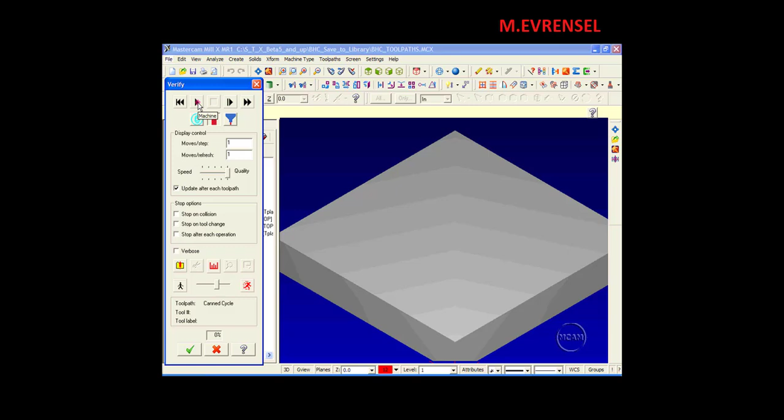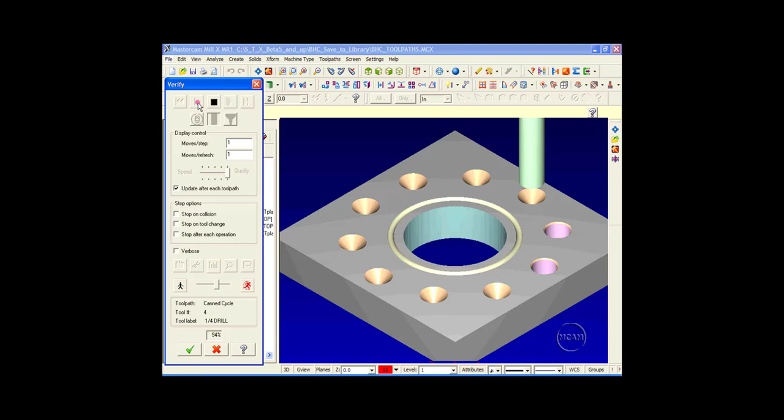Let's see how this looks in Verify. The center hole is being cut using a circle mill toolpath. The detail for the O-ring groove will be done using a contour ramp toolpath. The next operation is a spot drill operation, and this is being drilled to a depth that will leave a chamfer around the 1/4 inch hole. And here's the 1/4 inch drilling operation, and you can see the remaining chamfer from the spot drill operation.

Now the purpose of this exercise is, what if this detail is common to several items within a family of parts? I can create and optimize my toolpaths for machining this detail, then export this group of operations so that I can recall it at a later time and apply it to parts where I wish to use the same strategy.

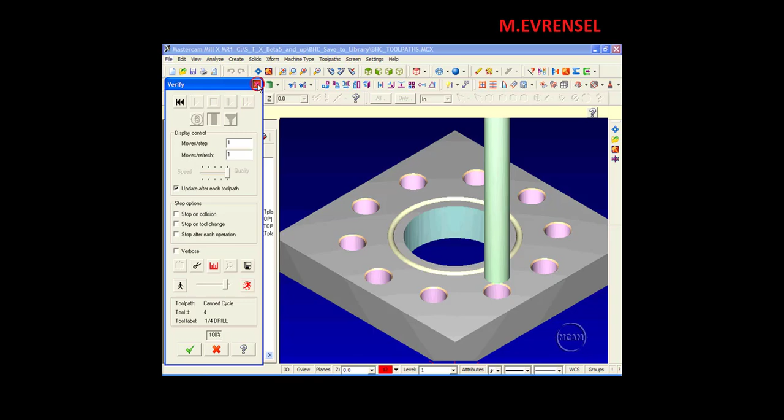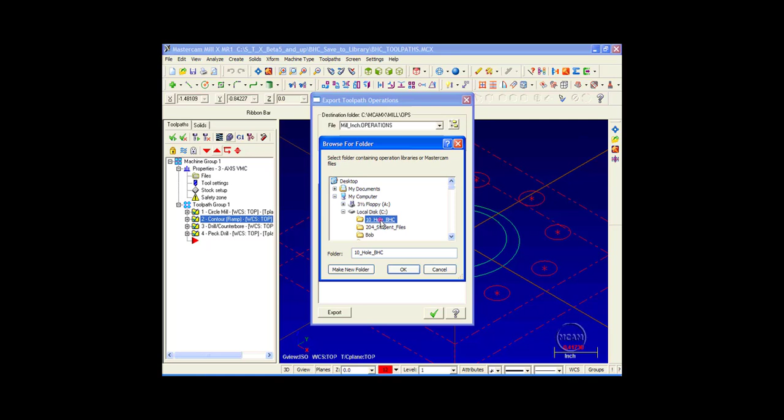So once I've fine-tuned the parameters of my toolpaths, from my Ops Manager I right-click, select Export, and then select where I would like to save this group of operations. I'll click my Browse button, navigate to a folder that I'd created earlier. It's labeled 10-hole BHC for bolt hole circle. Select it, and then click OK. I'll name my file the same thing.

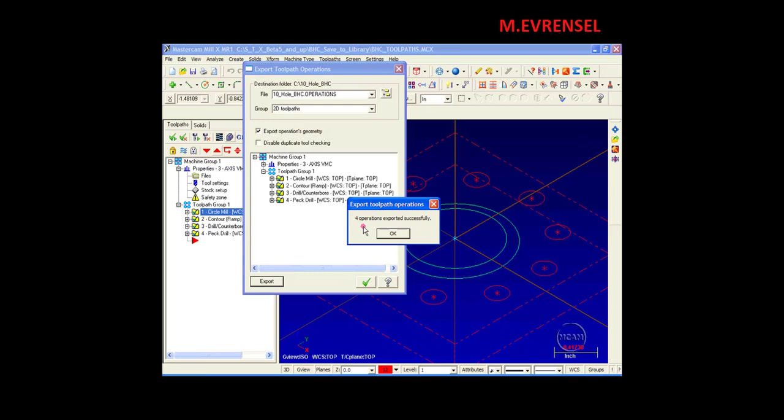Now I have an option to export the operations geometry. With this option checked, Mastercam saves the operations and the geometry that's driving those toolpaths. I'll select Export. I get a message telling me that my 4 operations were exported successfully. Click OK and OK. Now all of these operations are saved into a directory along with the geometry that is driving them.

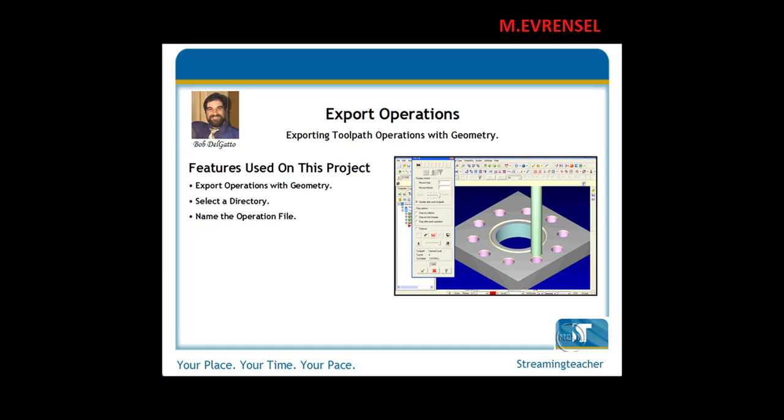Now that we've seen how to export operations to a directory, this video is going to focus on how to import them. This is a group of operations that will machine a 3-hole pattern around an instrument cutout.

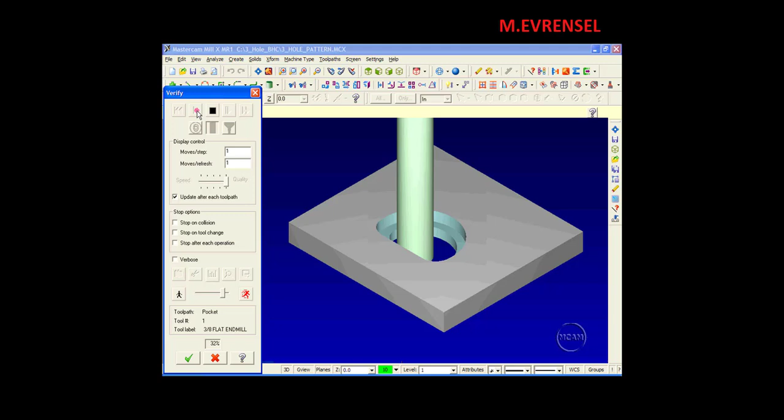We'll go ahead and run Verify so you can see the order in which the operations take place. My first tool comes in and roughs out the inner detail. The same tool machines a counterbore around the surface. My second tool comes in and finishes the inner detail, chamfer, spot drill, and drill.

Now let's say that this pattern is common to several of my parts that I've machined in my shop. So what I've done is I've exported the series of operations that are necessary to complete this detail along with the geometry that drives those toolpaths.

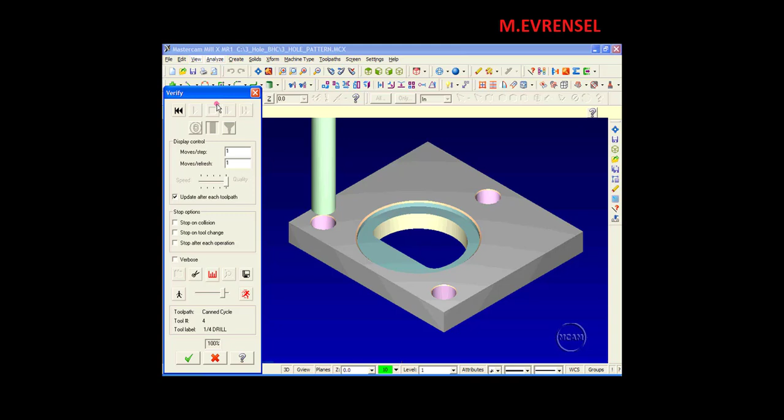So let's say that I produce a face panel for several different customers. Each customer uses the same face panel, but they each require their own unique hole pattern. The hole placement is the same for each of the customers, it's just that each customer has its own unique pattern. So I can have several different groups of operations saved, each group corresponding to the appropriate customer's hole pattern.

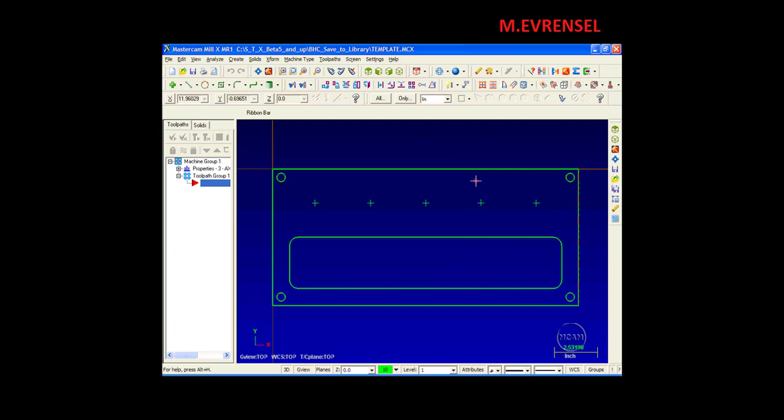Now before I import my operations, I'm going to go into my properties, go to my tool settings, and I'm going to make sure that I disable assign tool numbers sequentially. This way my tool numbers will stay the same as they are in my original operations. Otherwise what will happen is Mastercam will renumber my tools. In this case I don't want that to happen.

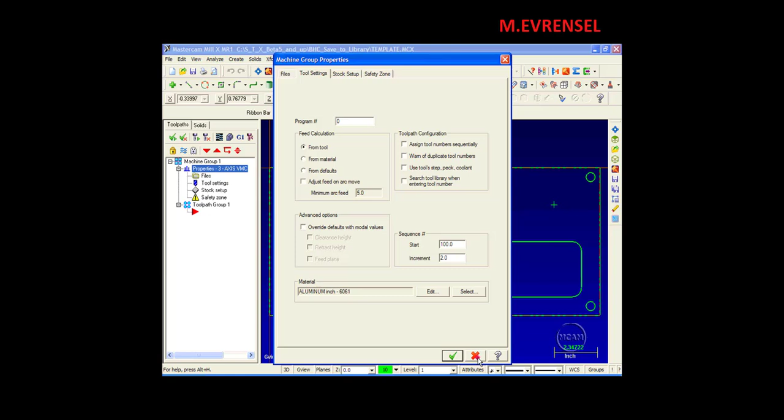Click OK. Now I'll right-click, import, go select my directory, and I have this saved in a folder for 3-hole bolt hole circle. Click OK. Import operations geometry and disable duplicate tool checking. I'll click Import. I don't want to add new toolpath groups, so I'm going to click No.

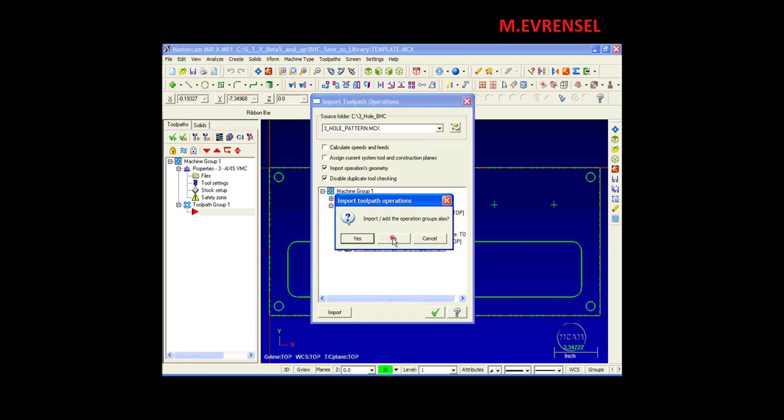Now I'm going to go and just select my points. And it's just like rubber stamping a toolpath. Escape to quit. 6 operations imported successfully. Click OK and OK. Now I have all of my toolpaths in here.

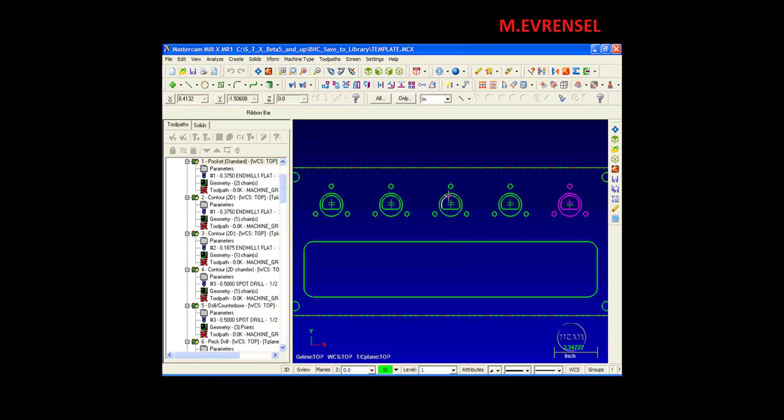I'll regenerate all of them. We'll go into Verify, Isometric View, and we'll run it. And we'll see that it machines all of the hole patterns just like I had saved it before.

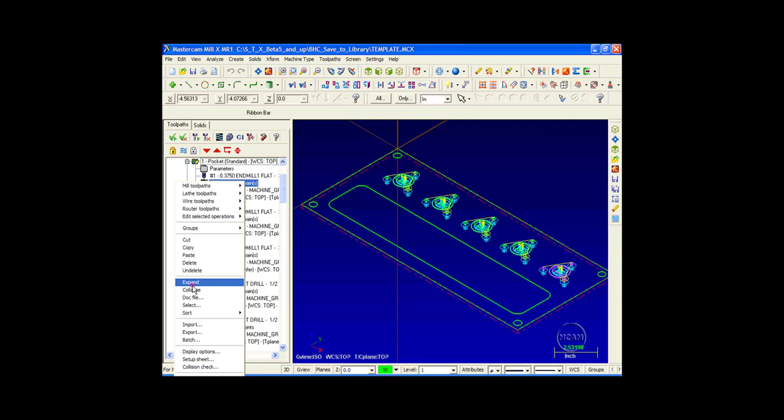Now the only thing that I'd like to change is it's doing each pattern complete, which means that there's going to be a lot of tool changing going on. So what I can do is go back to my Ops Manager, and I'm going to right-click and collapse, right-click again and select Sort, and I'm going to sort by tool number. I'll click OK.

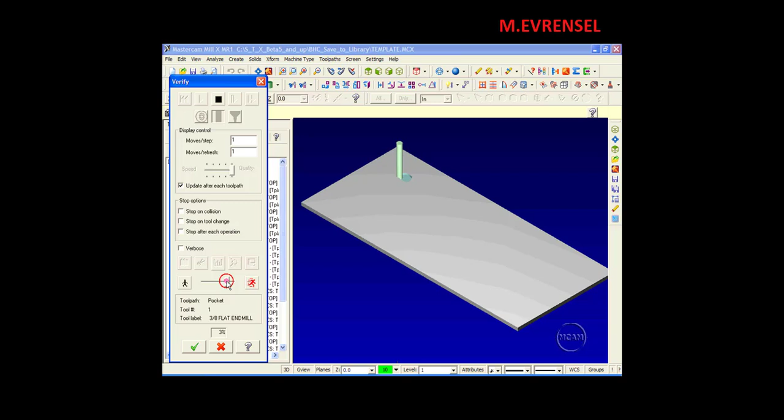And we'll see how this looks now. We'll go back into Verify, and we'll see that all my toolpaths have been arranged according to tool numbers now. So they've been grouped so that I don't have as many tool changes. It's going through and using tool number 1, doing all the machining, coming back in with tool number 2, and so on. And there you have it.

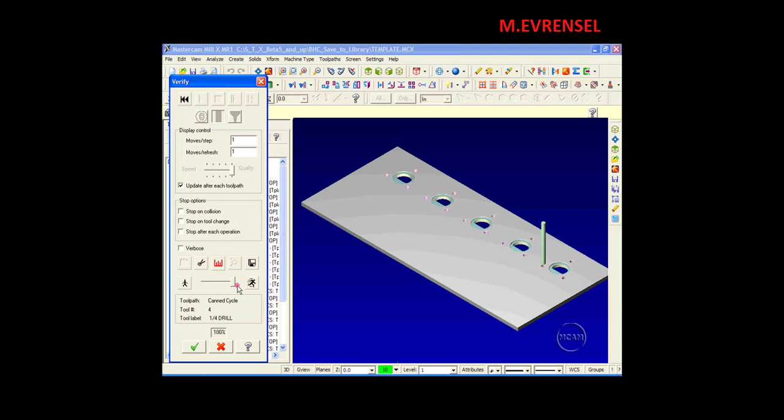So I've been able to create a series of operations, save those operations to a directory along with the geometry that's driving them, and then by importing those operations along with the geometry, it allows me to literally rubber stamp those toolpaths onto another part.